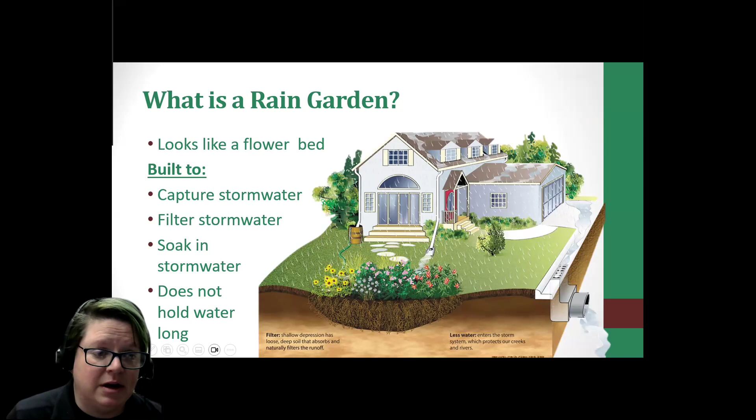So in this picture, you can see that water is being directed to the rain garden, and that is one of the main features, is that when it's raining, water is being directed straight to it. So one of the reasons why we want people to install rain gardens is it's a stormwater solution. It captures stormwater, it slows it down, it spreads it out because it's disconnecting that downspout from a storm sewer, and it lets that water soak in.

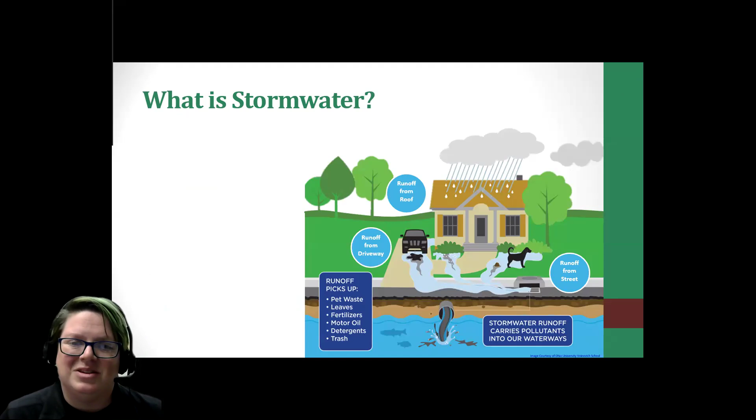But that brings up the question, well, what is stormwater and why do we even care about it? So stormwater simply is water that is from rain or snow melt or precipitation. We have recently had a lot of stormwater in the shape of snow, a lot. But when that starts melting, that all goes into our storm drains. And so in Ohio, we are very plentiful with stormwater. And that can become an issue when that stormwater doesn't actually go into the ground. When it runs across the surface, it's called runoff.

And that is a big problem in Medina because when the water enters our storm drains, it goes straight into our waterways. It's not filtered. It has no way of getting cleaned up once it gets into storm drains. So that includes any trash, any fertilizer, any animal waste, livestock. We have some in Medina. It can contain eroded soil or car pollution or yard waste. So those are all things that can be taken to our streams via stormwater.

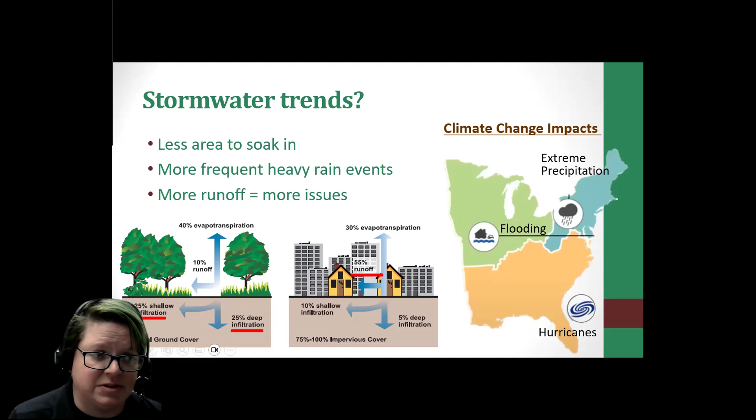Something else that comes up is as climate is changing a bit, we've started noticing in Ohio, which is in the green area in that picture of the states, we have increased flooding. We're also really close to the extreme precipitation area. So what this means is we're getting the same amount of water, but it's coming down really heavy, really fast, and it can't soak in as much as it used to. So then we are having a lot of runoff and a lot of runoff issues. And that can lead to larger issues.

Like this is a picture of Lake Erie in 2011. I don't know how many of you unfortunately remember when Toledo and other parts of the state didn't have drinking water because of an algae bloom.

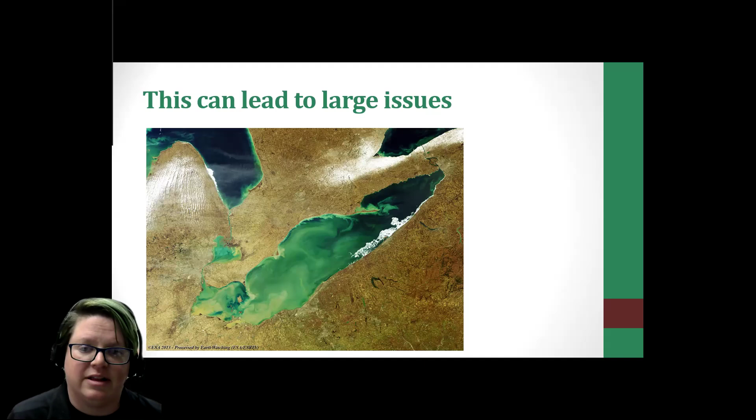Well, part of that is because of all the stormwater runoff taking things like fertilizer and nutrients to the lake. Lake Erie is also really shallow, so it has a bigger chance to have these problems than some of the other Great Lakes. So this all brings us right around back to rain gardens. They are built to capture this stormwater.

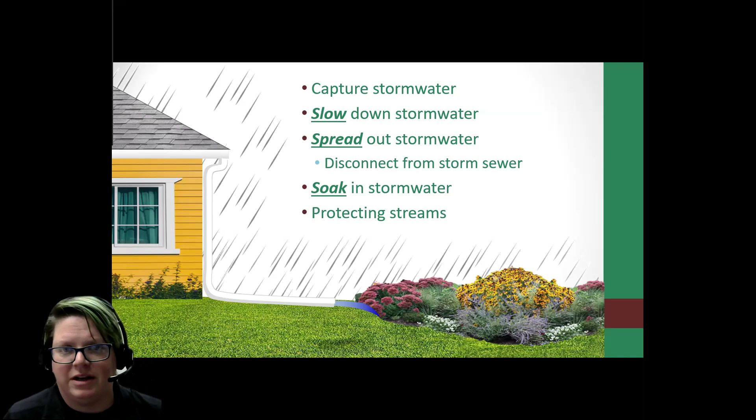They slow it down because that downspout is now not pouring water into a storm sewer that's speeding it away into a stream and causing flooding. It's now slowing it down, it spreads it out, and it lets it soak in. So this keeps pollutants out of our streams. It prevents land loss due to rushing, flooding streams. It replenishes groundwater, and when it's replenishing that groundwater, it helps protect us from drought conditions later. So it's extra benefit.

So one of the biggest parts of a rain garden is how it is shaped. It's not just a hole in the ground that you plant. It's not just very shallow or at an angle. It's always supposed to be flat at the bottom. So you can think of it kind of like a bathtub, that very flat bottom, except the bottom's like a sponge. So as it fills up, it's nice and flat and it slowly soaks it down and lets that water go back into the ground.

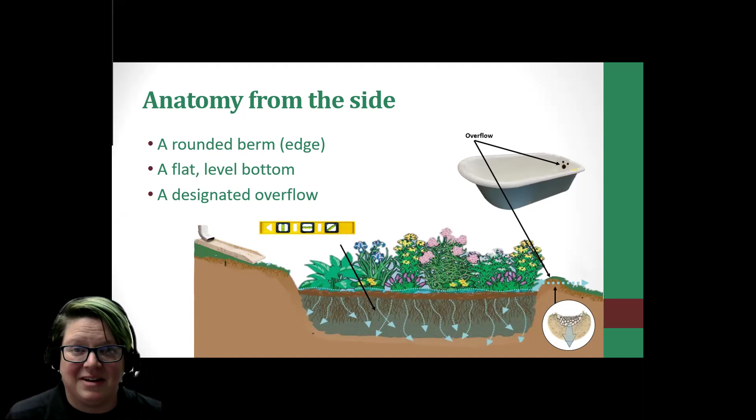Does anybody have questions about the purpose or the anatomy of a rain garden? You can feel free to unmute yourself. I think I made it possible where people can unmute themselves. But yeah, or you can put your questions in the chat. We are going to go into how to do all the details in a little bit. Let's see. Okay, so we have a question.

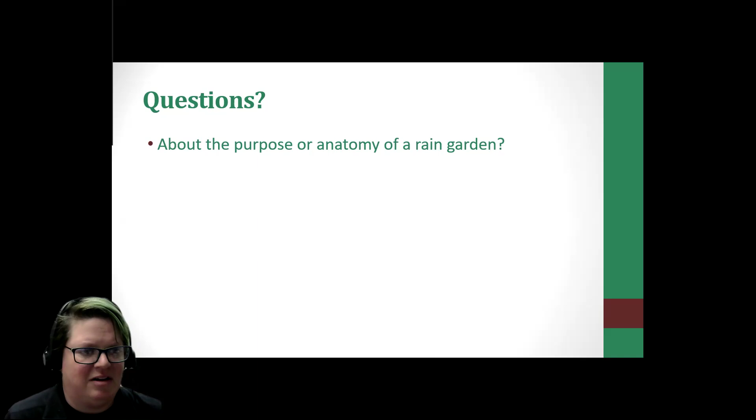So, okay, now we're getting into how to get started, things to look out for, and how you plan your location for your rain garden. For some people that are in the Make It Rain program that we offer here, I've already come out and helped you do this. But for anybody who's not part of that program, we're going to go over all the things you need to think about. So, like I said, this might be some review.

So, for planning, you always want to plan around your utility lines. Those are very important. But it's also important when you start planning to make a goal list. What kind of work are you okay doing? What kind of tools do you have or need? In that guide that I posted the link to, on page 28, it has a list of all the tools you'll need, some that are recommended, some that are optional. Then also what your budget is. So it's always good to look through the book. You can call us at any time if you have questions that pop up along the way.

But when it comes to finding your location, you want to start with a process of elimination. What do you need to avoid? This will help you solve a lot of problems down the way. You want to avoid a lot of these obstacles, and that can be your utilities for sure. Tree roots, we'll go into that a little bit; it can make a rain garden difficult. Sidewalks can be an obstacle. Your foundation, you always want to keep a distance from your foundation. We'll go into that too. Septic systems and floodplains. So these are a list of obstacles that you really want to think about before you start.

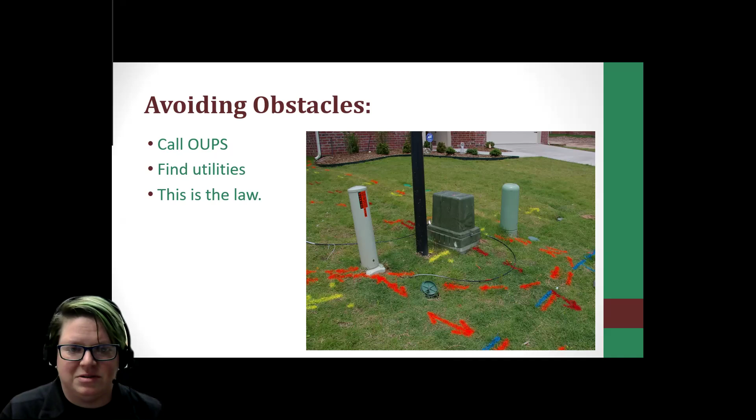The biggest one is your utilities. Before you do any digging, you're always supposed to call OUPS; it is the law. If you call them, it also protects you from being held liable for damages. If you're in the Make It Rain program, you need to do this and you need to keep the number that OUPS gives you for your ticket. But if you're just doing this on your own, we'll go over why it's important. First of all, I'm not an OUPS expert, but I did call them before this program and talk to them about how this process works. This is just my understanding.

They're the experts. So when you want to dig, you can either call them through 811 or you can go to eDig and put in your request. They will send you an email confirming that they have gotten your request. They have 48 hours to come out and mark everything, and then they give you 10 working days after your receipt to do all your work. But this is a planting project, so sometimes you might have to call them twice: they come out, mark everything, then you know where you can or can't plant.

They give you a 10-day window of protection where if you call them and they mark it and you don't dig there and you hit something, I think there's some liability protection if you do it within those 10 days. So that's the most legal mumbo jumbo we have to go over here. OUPS is important. It is a law. And if you do it how they recommend, you get some protections from damages.

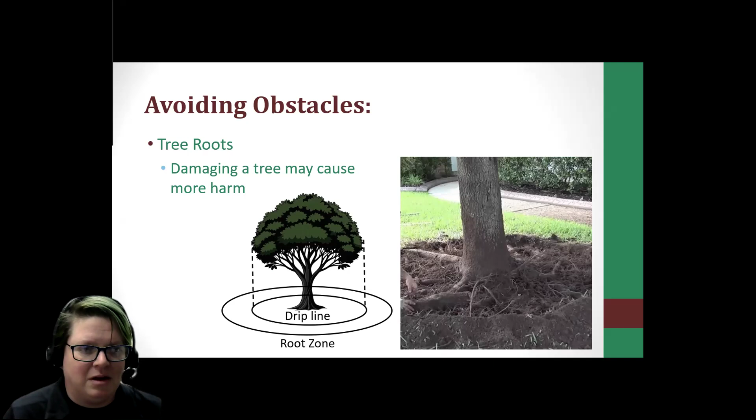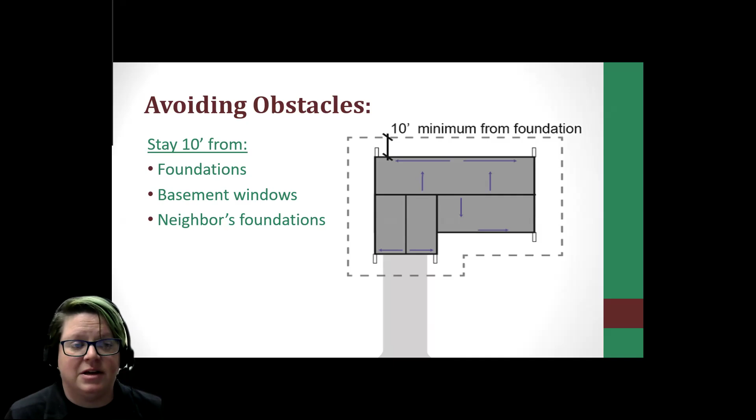Another thing to think about is your foundation. All these obstacles are also listed in that book, I think on page 9, so it's all there to reference and you don't have to remember everything right now. With the foundation and basement windows, or even your neighbor's foundation, you want to keep a minimum of 10 feet away. So with the question about whether there are rules that say you can't disconnect: if houses are packed really close, you might not be able to disconnect your downspout because of the 10-foot minimum around the foundations. But luckily in Medina, it's not something we come across very often.

This house, they wanted to have a rain garden and they wanted it right in front. And there wasn't 10 feet between this spot and their front porch. However, the foundation of their house was further back by the front door. So they were able to put it in this spot.

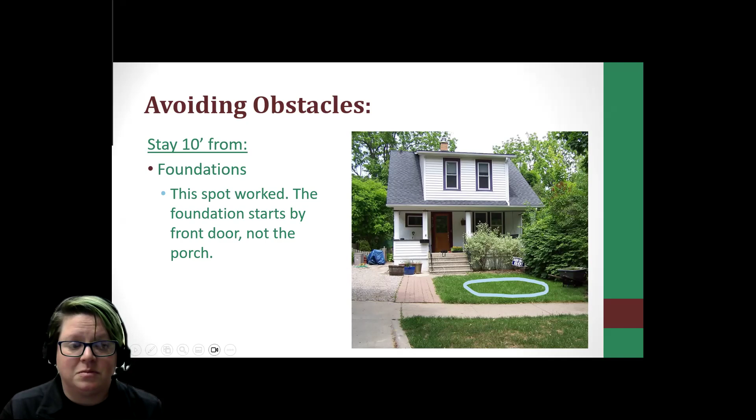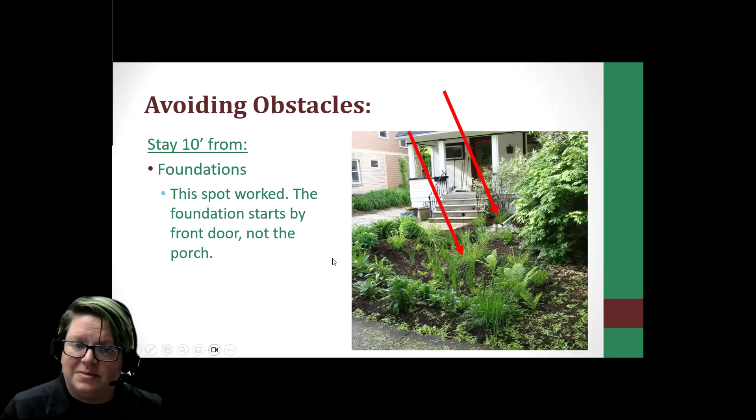Something else that they did to help was, you can see the one red line is pointing to the downspout. That is where the inflow is, and it doesn't start soaking into the rain garden until the second red arrow. So it's even further away than right against the house. So sometimes tight spots are possible.

So it's all about how you approach your obstacles. This house had to go underneath their walkway, so they dug a little ditch underneath it, and the up and down blue arrow is where they are planting their rain garden. So they went underneath, but they also did it this way because if you look at the neighbors, they have two downspouts. It's a little hard to see in this picture, but those two downspouts are pointing to the same rain garden. So this rain garden is serving two houses, and the homeowner just went under their sidewalk to make it possible.

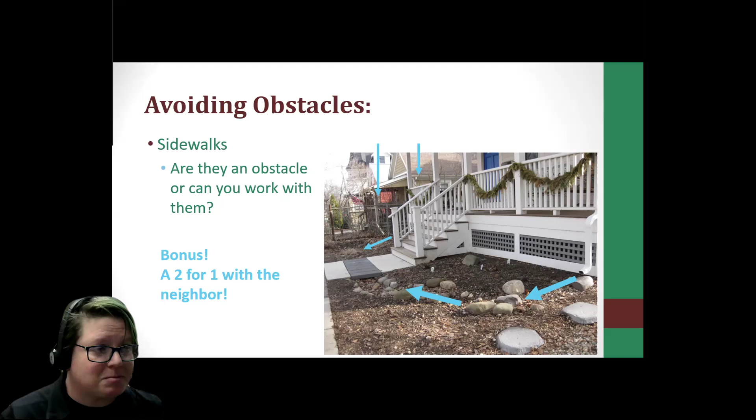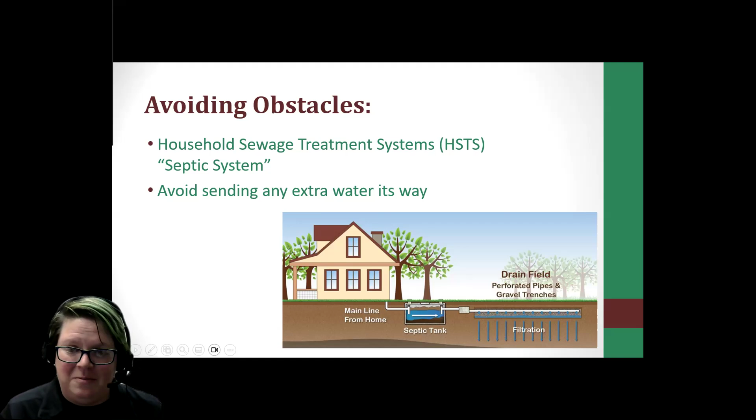Another obstacle that's important to know, and this is still something that a lot of houses in Medina, or like Medina County, have, is what most people call a septic system. So it's a household sewage treatment system. If you talk to the health department, it's not technically a septic system, but it's what everybody calls them. So one important thing is you don't want to send extra water to your septic system or to the leach field. So that's definitely an obstacle you want to avoid, along with floodplains.

There's a lot of protections around floodplains. That is the area next to a stream or river where, when the river rises, it has that extra area to flow over. So it is a plain of land that the floodwaters go over. So putting a rain garden there is not a good idea. Disturbing land in that area is not a good idea.

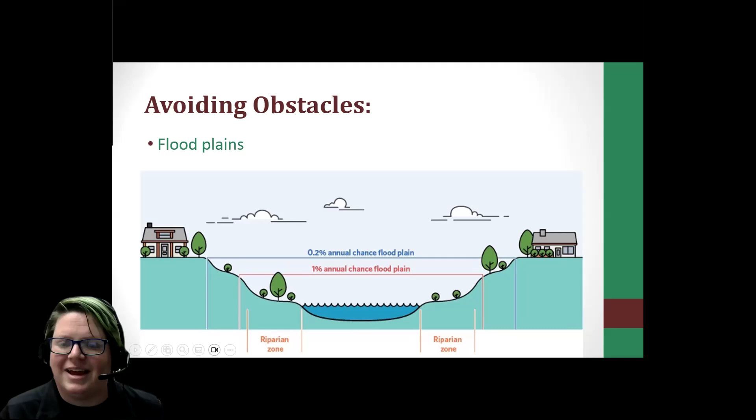So, alrighty. Any questions about obstacles? I know that was kind of a quick go-through on obstacles. Okay, so no questions there. Okay, so we're looking pretty good for questions on obstacles. Alrighty, so we'll keep going.

Next thing is about looking for a location. Now that you know what obstacles to avoid, you want to look at what you want. And that is, where is your water source coming from? How are you going to get water to that area? And also, what is the light level for the plants that you'll be planting in there? Now, rain gardens can thrive in any light condition, but if one of your goals is a really beautiful, showy rain garden, sometimes you have a wider plant selection if you are in a sunny area. There's a lot more plants you can find that can love having wet soil in the sun. So just something to keep in mind.

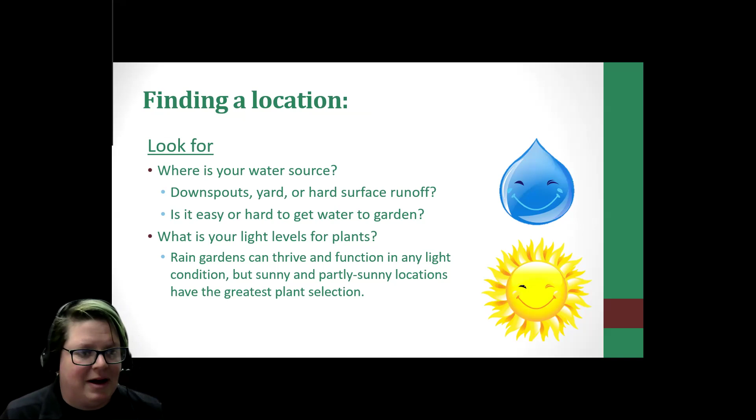And then another thing to think about is slope. So you can do a rain garden on a very sloped area, but it does take a lot of extra work because the rain garden is supposed to have that flat bottom, and if the land is really crooked, you're trying to adjust that land a lot.

If you have to have a retaining wall to make it high enough for it to be flat, if it's over 2 feet in height, it's not something we can give recommendations on. At that point, you would need to talk to like an engineer. A 2 foot retaining wall to hold back water you're directing to it is a whole different scenario.

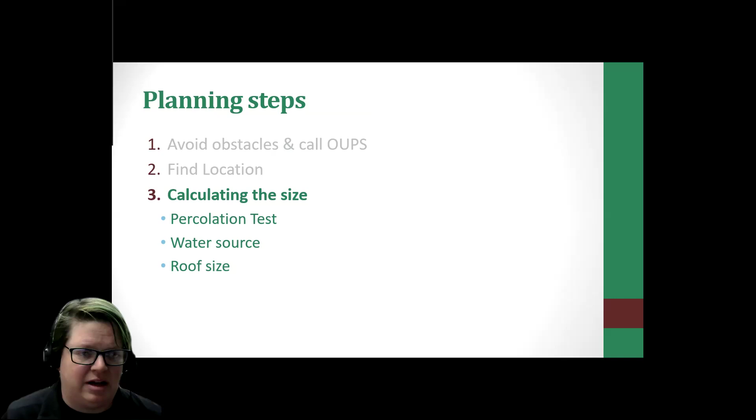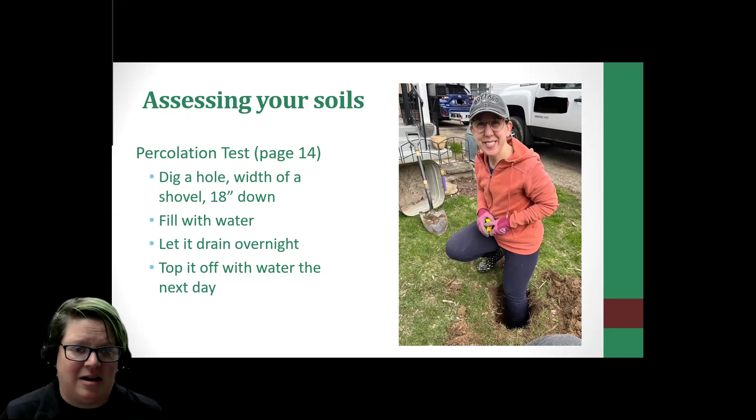And the first step is you fill it with water. You let it drain overnight, and this gives it time to soak into the soil around it. And then you top it off with water the next day. So once it's topped off with water, then you start timing it. Does it drain within 24 hours? Does it take longer than 24 hours to drain?

So however long it takes to drain, over or under, is going to affect the size and also how deep you dig your rain garden. So you can make note of this on page 14. Once you do it, you can write it down, circle it, mark it in your book. And this way you don't have to remember it later, because you can think, oh, was it under a day, over a day? But that does affect the size and the depth of your garden.

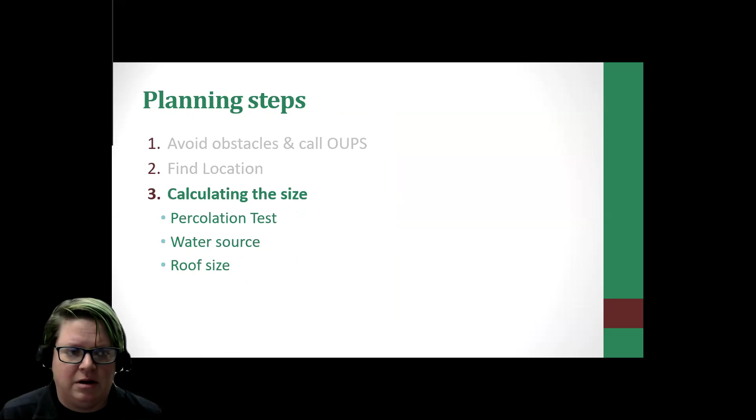Okay. The second thing is the water source. So there's two types of rain gardens. There's a traditional rain garden, which the water is directed to that rain garden from a hard surface via a pipe, a downspout, or a direct source. So a traditional rain garden will be fed by a pipe or something hard like that.

The other type of rain garden is what's called a non-traditional rain garden, and this is where water is directed to your rain garden through running off of a surface with undefined or natural edges, such as a swale, a yard, or a parking lot.

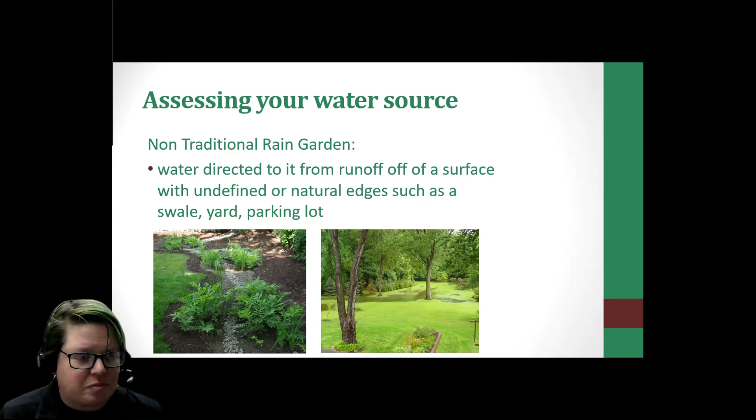So depending on which type of rain garden you have, you use different equations. And that's in the book, and that's something we can walk through too, if you decide to go ahead and do a rain garden. But this affects the size and how you do your equation.

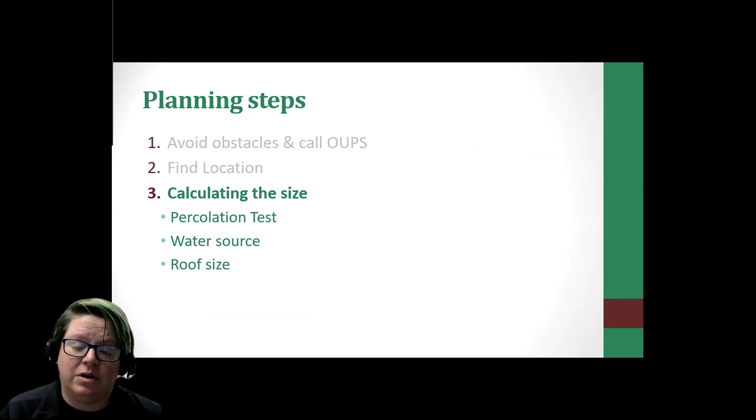So, okay. The next thing is roof size. So we're going to stick with the traditional rain garden just because it is easier. It's so much more straightforward, where you just have to find which downspout you're using and how big is the section of the roof that feeds into it.

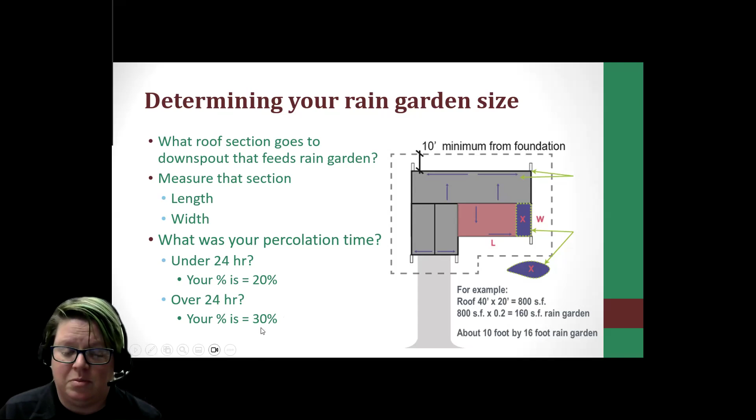So if it was under 24 hours, your percentage that you're going to be using for this equation is 20%. If it's over 24 hours, you're going to use the percentage of 30%. And it's as simple as that. I know it seems like a lot to figure out, but you have the length, the width, and your percentage, and that is the size of your rain garden.

Now, the reason why there's different percentages is because a faster draining rain garden can be smaller and deeper. So it can be 20% of that length and width size and 6 inches deep. And that's because it will drain in a time where you're not getting mosquitoes growing and you're not drowning out your plants.

So a faster draining rain garden is smaller and deeper. A slower draining rain garden needs to be a little bit bigger so that water can spread out, and it needs to be shallower, and this prevents pooling. So that is the only equation that you need to figure out the size. And we have the step-by-step walkthrough in the book on how to do it.

And if you want a copy of the book, you can come to our office. That way you can write all this down in there. There's worksheet pages, so it walks you step by step.

Okay. But if you get a size that's really big, like if you're sending all the water from your whole house to a rain garden, the size that you get might be too big for you to manage. So the thing is to plan a size that you can manage. You have your recommended size, but is that too much? Don't worry about it. No matter what size you calculated, just do what you can. Smaller is totally fine. You just want to make sure you have a good overflow.

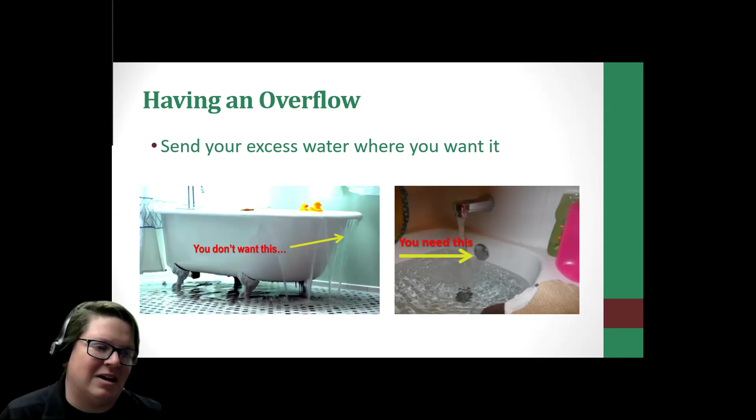Something else is the position of the overflow. So even though a rain garden is supposed to be completely flat, when we do get those really heavy rain events, like it's just pouring and we're getting a third of all of our rain for the year in one day, that water is going to be moving fast. So you want to give it the longest route through your rain garden. This way it slows it down as much as it can, and it helps prevent erosion.

So if you look at the bottom iffy corner, if that water's moving really, really fast, that downspout is pouring water directly where the overflow is, like right above it. So it could lead to erosion issues. Some people don't pay this any mind. I have seen some issues with a little bit of erosion, so it's just something to think about, but you don't have to think too much about it.

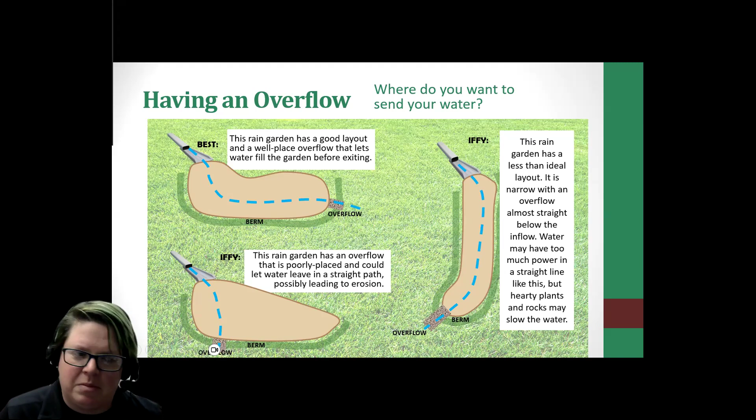Okay. So now you have all the tools that you need to start planning. You can get a blank piece of graph paper, or on page 20 of the guidebook there is graph paper, and you can just draw your house on there, draw where the trees are, where any barriers or obstacles are, and then you have the size of your garden. So if each square is a square foot, then whatever your number was, you can count that many squares in that shape, even if it is an odd shape, and that's your square footage.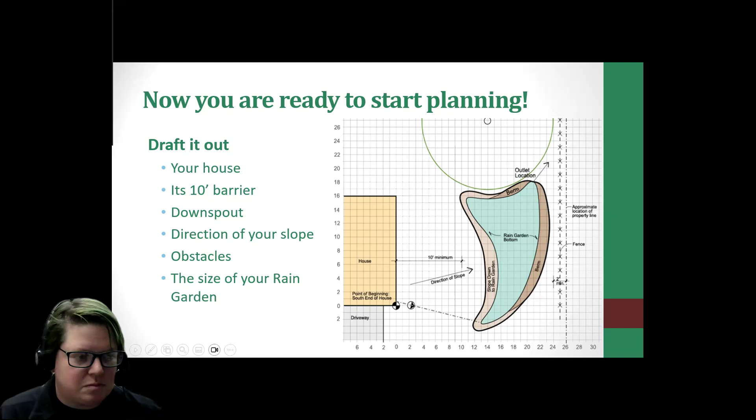So, okay. Any questions about size or shape? And we will have a tiny little break here too, so you can stay and ask questions if anybody needs to stretch. I know it's been 45 minutes, but any questions about rain gardens and their parts or obstacles or the location? Let's see.

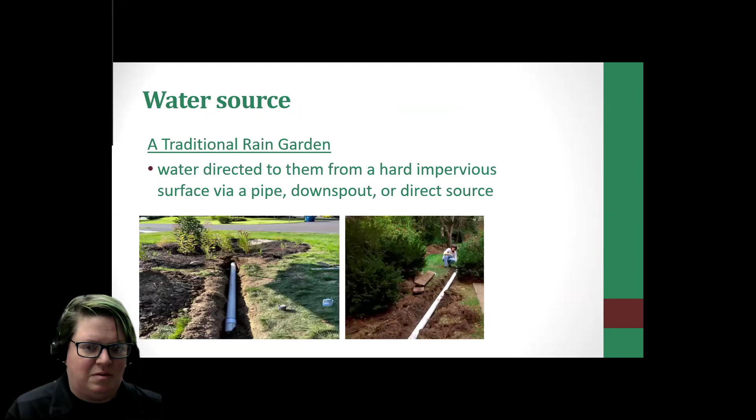Any other questions? If you just Google trench drain, that'll probably come up. Yeah. And I've seen people do this at the end of driveways too. Because you'll have a lot of water going down the driveway and they don't want it eroding right where the driveway meets the street, or if it's draining towards their garage, they want to wick it away. So this is pretty common.

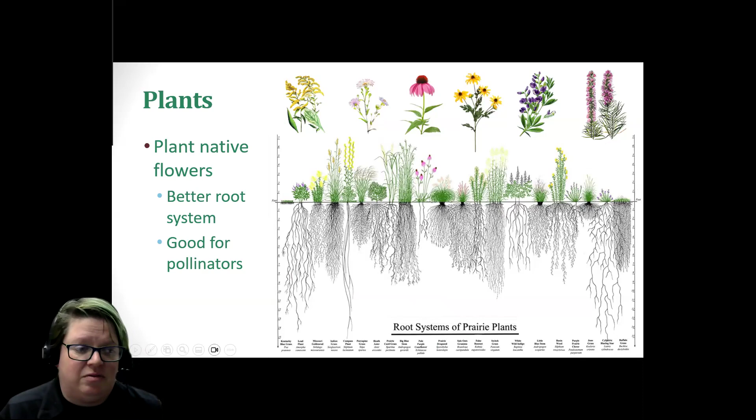So that's really nice. And when you're choosing plants, there's bloom times and colors, so you can choose when things are in bloom. And if you want something to be in bloom from April to October, then you can choose which plants fill that niche. We have a whole booklet about that, and I will put a link to that on the YouTube recording of this. And I said that wrong.

Oh my goodness, that makes me feel out of touch when I talk like that.

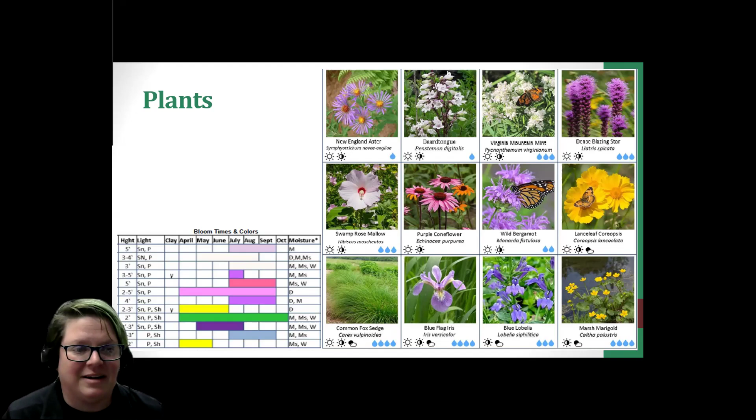But I will include a link to that pamphlet. So if you're looking for native plants, you will have access to them. And that is something also that our office can help with.

So if you have your location and your shape planned, this is an example of a prescription planting that I drew up for a church that wanted to put in a big rain garden. And all the little shapes were different plants with heights that corresponded to how they wanted it higher in the back towards the big tree. So that's something that we can do for you too.

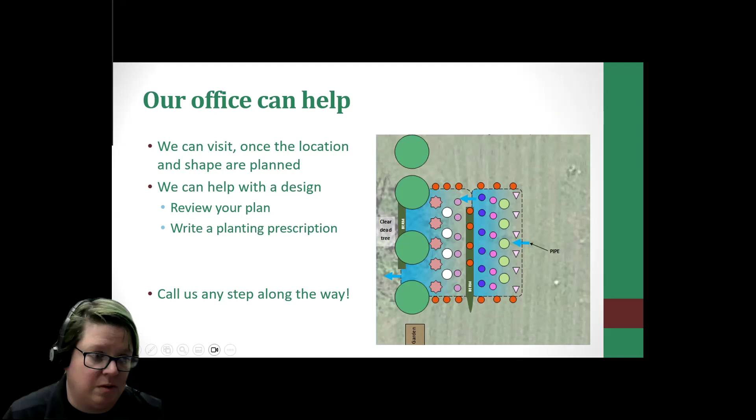This woman, Helen, she did a great job of planning one. She had a list of 29 plants. Very ambitious. That is not my style, but it is a lot of people's style. I've seen where people can do as little as 5 if they really just want to start off with something. So it can be as big and grand or as small and reserved as you want.

But something that I like about her design is she walked it out in the wintertime. And that's why I included this picture: once she got her size, she walked it out to see if that was going to be a good location and size, and then she went planning from there. So in the how-to guide from pages 25 to 27, there's different examples of rain garden designs, some for full sun, some for partial sun, some for full shade, just to give you an idea of what's possible.

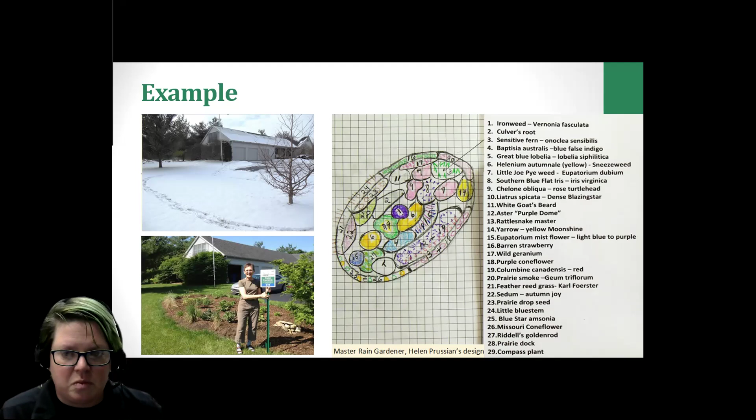Okay, any questions about plants before we move into building the rain garden? Okay, nope. And like I said, plants could be its own presentation. We do presentations on just plants. So if you want more information, we can go into that. But let's get into the construction.

So installing your rain garden. At this point, you'll have your design drawn out. It'll be away from any obstacles. You'll know where your utilities are. So you want to transfer your design, direct your water to it, dig the basin, make sure it's level, put good soil into it, plant it, and maintain it. So we'll go through how to do that.

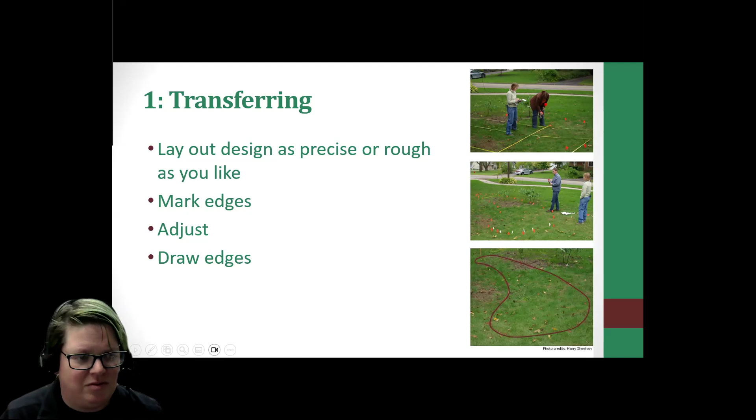So when you transfer your drawing, you can be as precise or rough as you like. So in this example, they laid out some tape measures and then flagged the area and then adjusted it and then spray painted it for the edge so that they could dig it. As long as it's roughly the size that you had planned, then it all works out.

Okay. And then the next thing you want to think about is how are you going to get your water there? So you can do a couple different ways. First, you want to make sure that your rain garden is downhill from your water supply. Sending water uphill doesn't work, not easily and not for this at all.

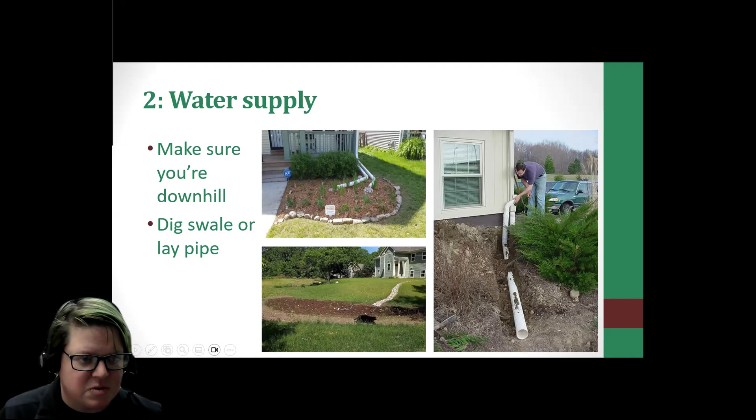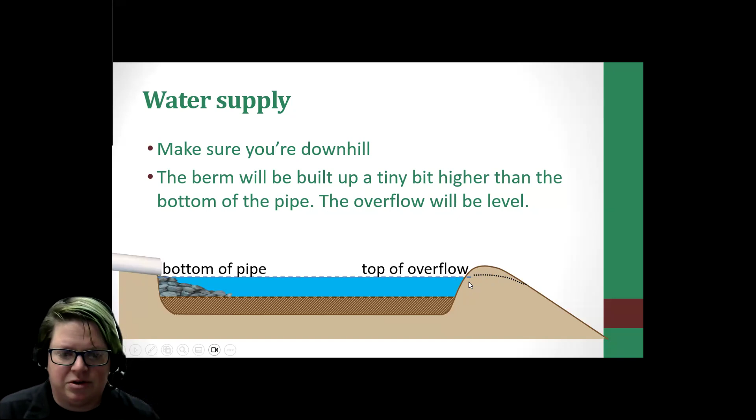And here we get into how you want your pipe positioned. So your berm is going to be a tiny bit higher than the bottom of the pipe, but the overflow will be level. So you can see that dotted line, that is the curve of the overflow. It cuts through that berm and the extra water goes there. So you want to make sure that that is all level. So that's a finished example.

But when you're beginning, you have your original grade of your soil, and this is with the pipe over top of the ground, like what you see here. And what you do is you get a line level or a string level. You put a post at your inflow and a post at where your berm's going to be, and you make sure that it is level.

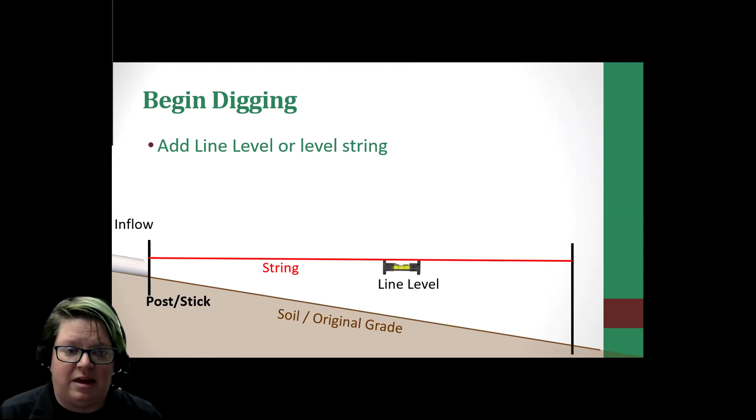And then now you want to start to figure out how deep you're going to dig from the inflow. And this is all dependent on your percolation test. So if it drained under 24 hours, you want to dig 6 inches down. If it drained over 24 hours, you want to dig it 3 inches down. So this is why it's good to use that guide booklet, because then you don't have to remember things. You can just go back and reference that, because that would be on page like 14.

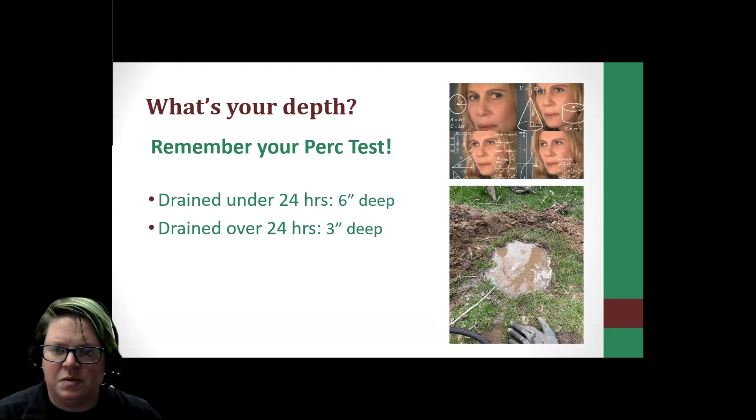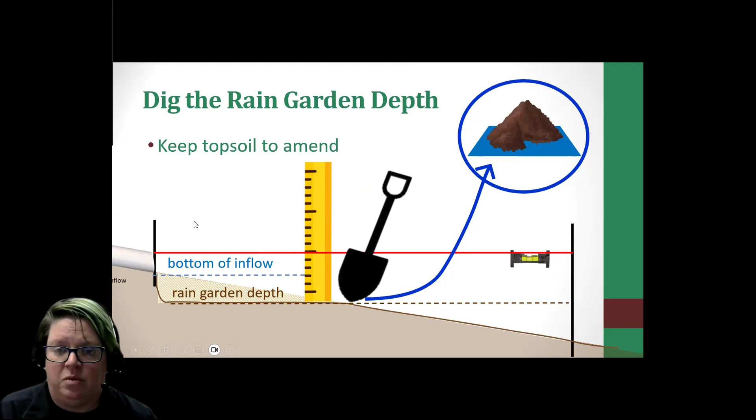So yeah, so you dig down that depth. So this one, it's 3 inches down, and that's the depth of your rain garden from the bottom of the inflow. And you want to keep the topsoil because you're going to mix compost or healthy soil in with it. So you dig down your 3 inches in this example.

And if you had really, really bad draining soil, like if it's just pure clay, you want to dig about 2 to 6 inches down more to add a mixture of your original soil and your compost. So it's going to be your rain garden depth plus the 2 to 6 inches. So that is going to be your bottom.

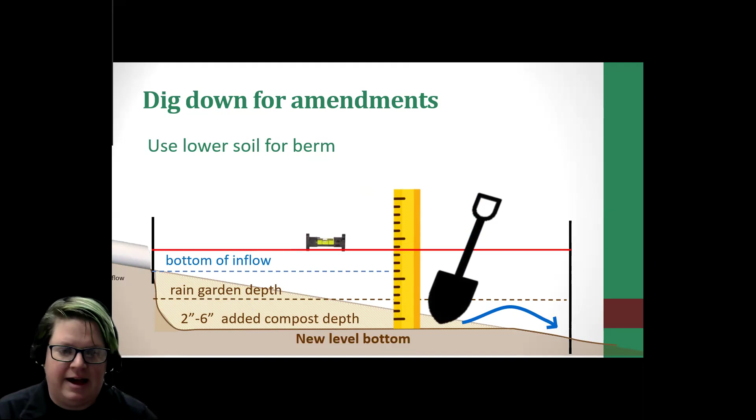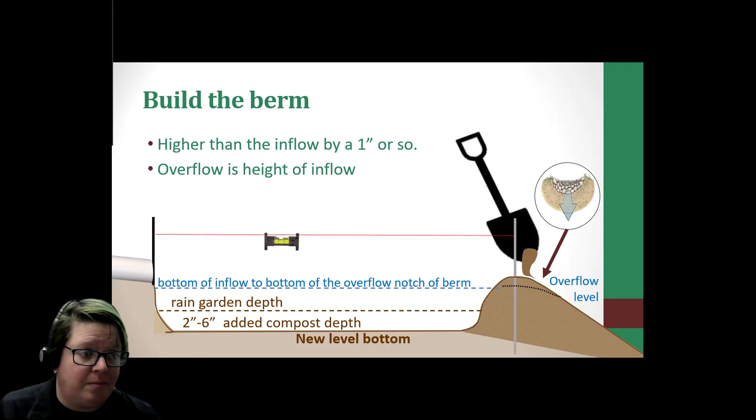Now if it's a really steep area, this is where it gets tricky, because you won't be digging too much earth out, but you'll need more earth to build up. So if you look at the light tan part, that's your dugout part, that is so much less than the dashed darker brown part, that's the berm.

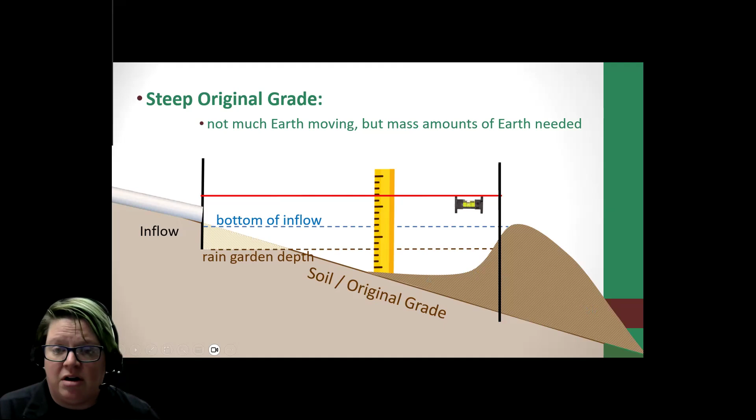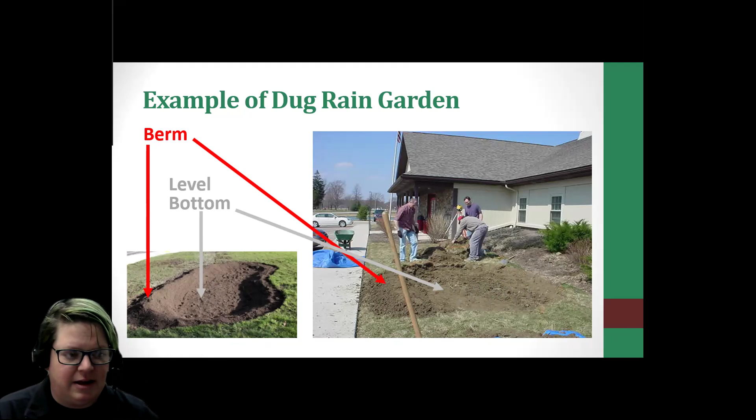And what this looked like, the one on the right is our office. So we ended up not having to dig super deep, just the 3 inches, and then we put the soil onto the berm. So here you can see the level bottom and the berm. So that is what your rain garden starts looking like. And it should be level. So the bottom of your pipe should be level to the bottom of the overflow, and then the berm is like 1 inch higher.

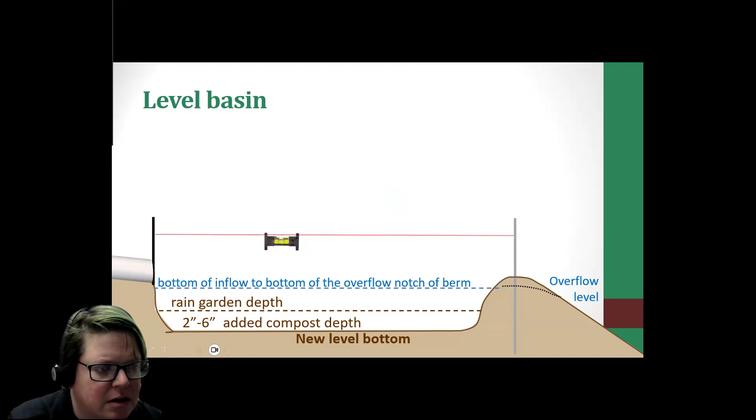And okay, a question about how do you make sure it's level? So that's why that red line, that's a string level or a line level. That red line is your string at the top of the poles, and you can just take a ruler and go across it to make sure that's level. I think I had one picture. Oh, there we go. So yeah, across the bottom, you kind of want it to stay level on the ruler, just mostly. You don't want like a 3-inch dip somewhere else. So I hope that helps.

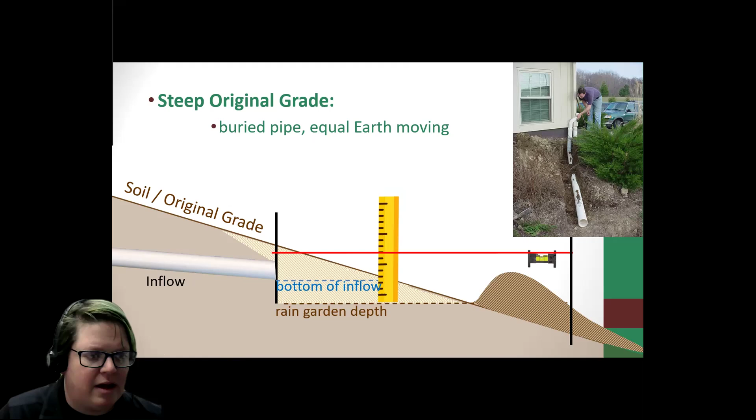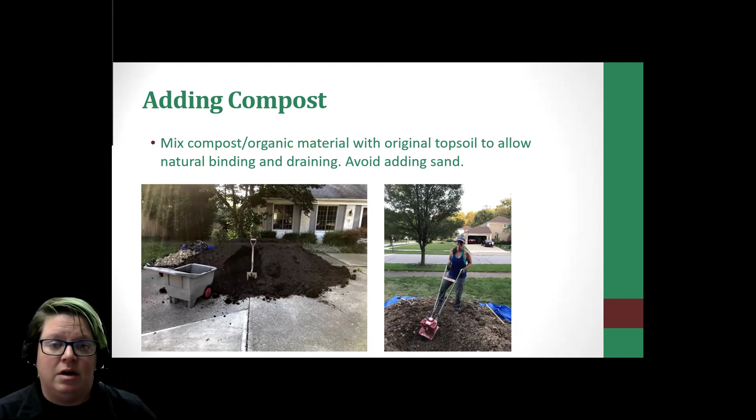Okay, we'll go back. And you might have to do it twice, because once you get your amendments, like your compost or organic topsoil that you might want to mix in with yours, you're going to add it back in and bring it back up. So here you have the dugout garden, the amendments are added in, you mix the original soil in with the amendments, and you mix it all up. They didn't need a rototiller, they just dumped some together and mixed it with a rake.

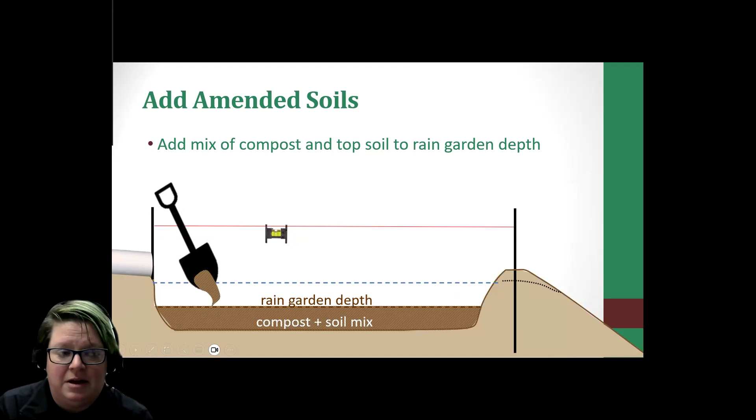And then you want to make sure that is level too. But you want to make sure it's level after you lightly compact it. So you can do a little stepping down or stomping on that compost and soil mix, because if it's lightly compacted, then it's not so airy, and that's better for your plants. So you just kind of want to pour it in there, mix it up, step all over it, and then make sure it is level.

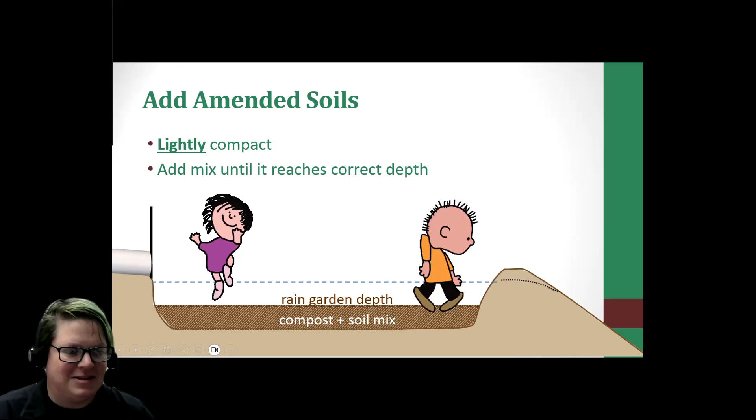So, sorry, I love Peanuts, and those little dancing kids are just great.

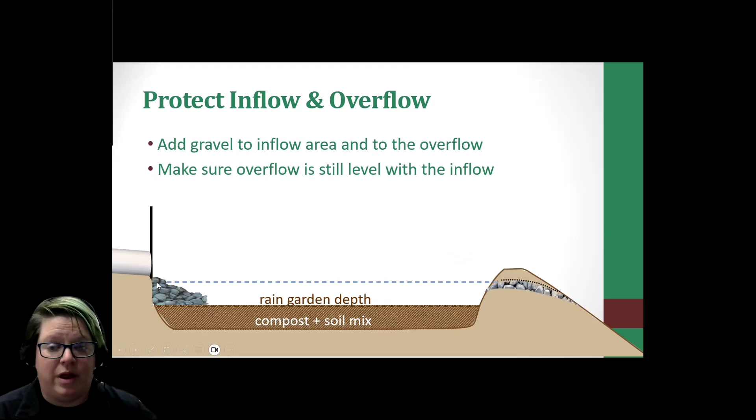So one of the last steps you do before you start planting is you want to add some gravel to the inflow area and to the overflow. This just makes sure that you're not going to get erosion at that point where the water is coming in or going out. And from there, you plant into that mixed soil level, and your plants will be lower than the inlet and lower than the overflow.

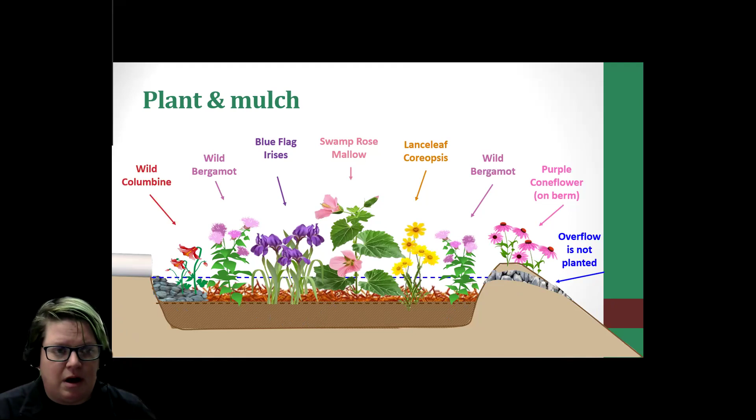And this is just an example of some water loving plants. And then you just add some mulch on there. It protects your plants. And the first year or so, you do want to water them between some of the dry spells just to keep them going.

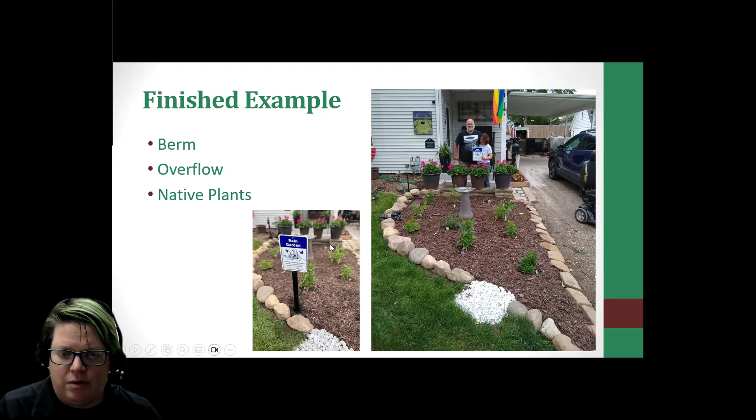And this is an example of, I think earlier in the percolation test, you saw that her leg was in the hole. This was the garden that they put in. And so you can see there is a berm. She decorated it with the rocks. I think there's maybe like 8 native plants, and then they have the overflow and also a sign. So if you're in the Make It Rain program, you do get a sign when you install your rain garden properly.

And say if somebody else is interested in doing that, we can see if there's a possibility we could get you a sign or not. But the reason why we like signs is that it does show that this is an intentional area, and it is protecting our streams and rivers. Also, whenever you do a rain garden, it's good to have a maintenance plan.

Let's see. Oh, and we do have a question about if it's going to be tricky to keep it level while adding the plants. So, yeah, it's more that you don't want a really, really low area where you're going to get ponding. So it doesn't have to be perfectly level. You will get parts where it might be taller around a plant, or a plant might be a little bit lower, and as long as it's not just going to be an area where the water pools, that's probably the biggest part for trying to keep it somewhat level.

Because if an area is too much deeper, then you're going to just have water settling in one area and it's not going to be functioning properly, but it'll be okay if it's pretty close.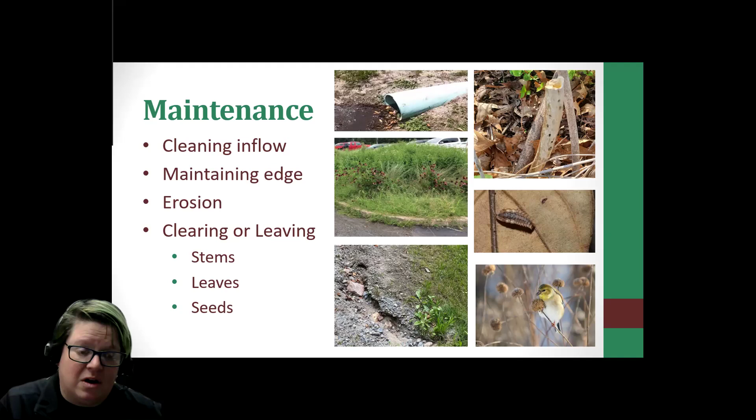Because also that picture that has the stem with all the little holes, that is a native bee using that dead stem for food storage or even for its larva over winter. So dead plants are a really important part of the ecosystem.

Okay. Oh, good. We're doing good on time.

All right. So we've gone over a lot today. And if you're looking at what your next steps are, if you're interested in putting in a rain garden, take your measurements and see if it's comfortable for what you feel like you can do. If you feel like you can do this, then call OUPS. Make sure you're not planting this on top of your utility lines. And then go through the book and use it as much as you can.

Do your sketches, choose plants you like, rough out your area, and then make your goals. And then when we finally get a warm day, do a percolation test. That won't be for a while, but that is the summary of how to do a rain garden. And sometimes there's classes that are 5 days long about how to do this. So I hope an hour and 20 minutes wasn't too bad for everyone.